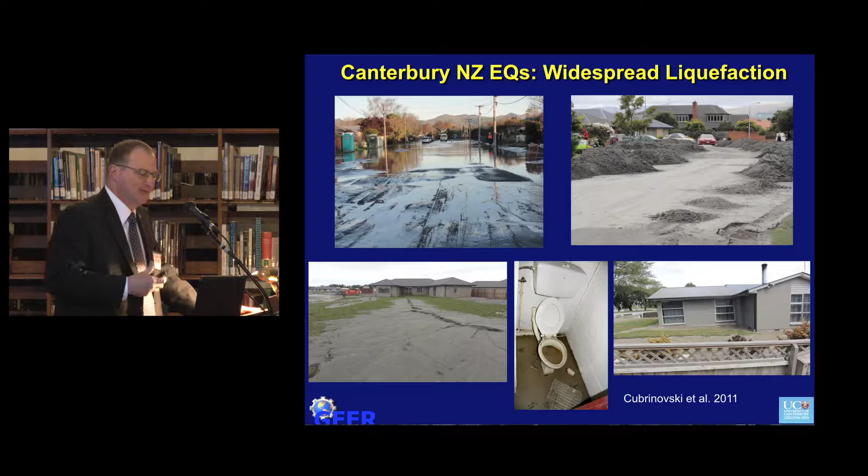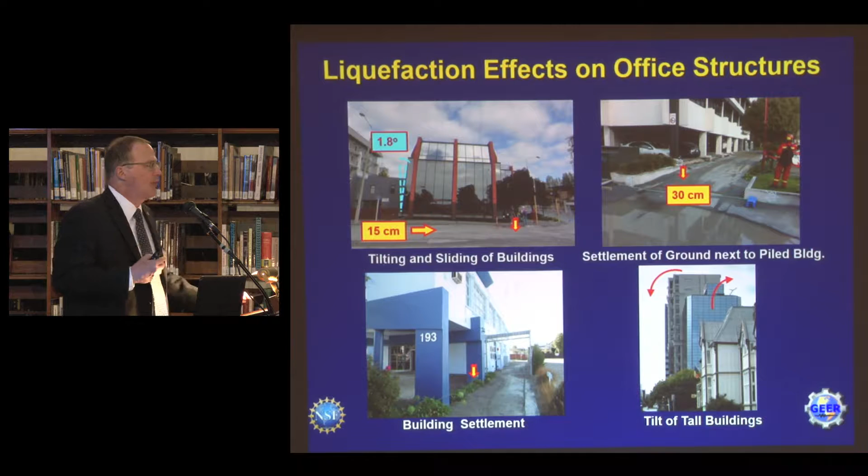There were important issues in terms of the office buildings in the central business district. There was an area that had pervasive liquefaction from the 2011 Christchurch earthquake, and we saw tall buildings - even buildings that were 11 stories, even one that was 21 stories tall - have ground that softened and allowed the building to basically tilt, and that was one of the reasons why the buildings were taken down.

When we talk about liquefaction effects, geotechnical engineers realize we have this empirical method where the demand is the cyclic stress ratio, and the capacity is what separates liquefaction effects being observed at the ground surface from where we have no liquefaction. That transition line is called the CRR, the cyclic resistance ratio. In the simple world, factor of safety is the resistance or capacity divided by the demand.

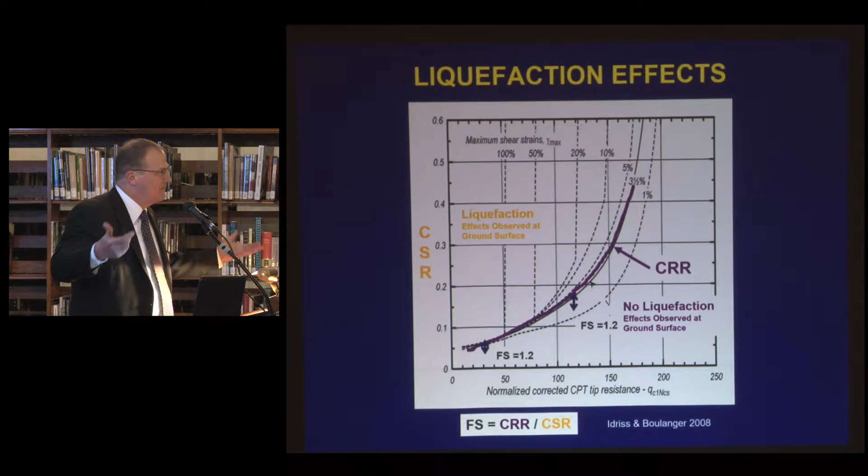What's misleading is we calculate factors of safety, and in this region we could calculate a case where this is our demand, that's our resistance, a factor of safety of 1.2. In this area we calculate demand and resistance and again get a factor of safety of 1.2. That might lead you to think same factor of safety, same effects.

But it's very important that liquefaction is not the same on the left side of this curve as it is on the right side. When we get to low penetration resistance, notice the backdrop I have - strains. We don't want to just talk about liquefaction triggering, because that's one thing. We want to talk about the consequences or effects of liquefaction. You can see here you go from very small strains on the order of 1% to very large strains with small changes in resistance or small changes in demand. That should make us all very nervous.

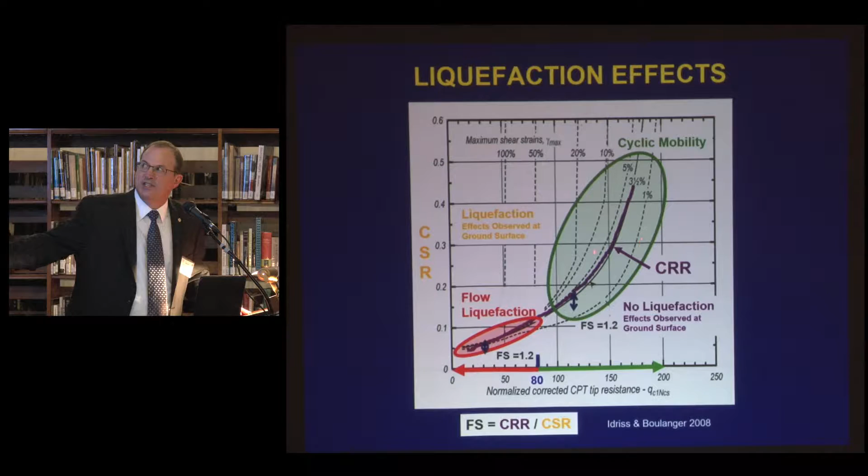That is a brittle failure, and being a little bit off in our demand or resistance calculation can be the difference between having no damage and having severe damage. This is an area where we can get progressively more strains, but it's more of a gentle hill, and therefore the consequences are different. So even though we call it all liquefaction, I think that's one of the mistakes we've made as geotechnical engineers. We really should call this flow liquefaction, or the potential for large deformations, whereas this is cyclic mobility with limited strain potential. They're different animals.

One of the very important lessons from Christchurch was that the most valuable tool was the cone penetration test. It was nearly continuous, giving us this true look of what this fluvial environment looked like. If we're able to catch that at a building scale, we have to have a cone penetration test. They have done now over 22,000 cone tests since the Christchurch earthquake, because that is the most reliable way in sandy and silty materials, and even some clay materials, to characterize the ground.

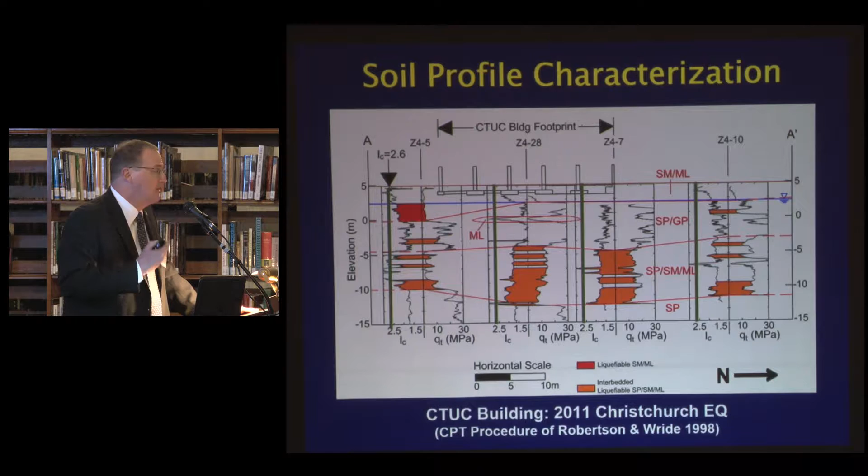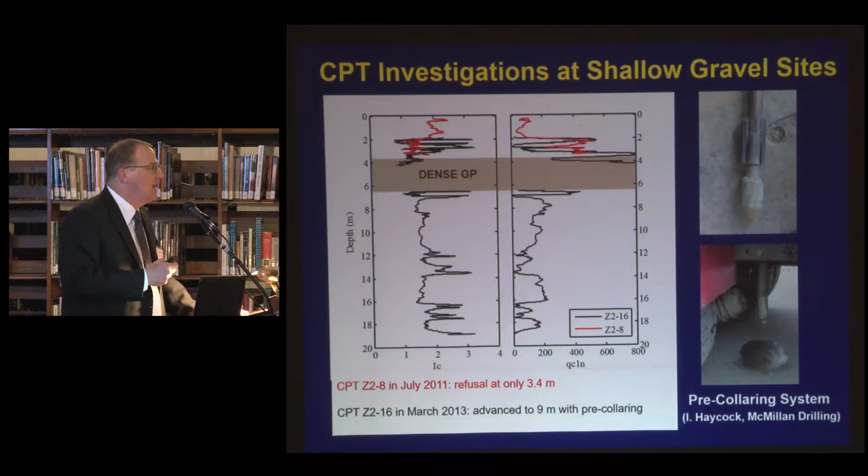One of the arguments about using the cone is, well, I can't advance it through dense gravels or slightly cemented soils - and that's not true. Using Kiwi ingenuity, they came up with a pre-collaring system where, when we hit ground we had not been able to get the cone through back in July, with this new device we were able to essentially use a dummy cone to vibrate through the dense gravel. Once we saw it started to loosen up, we could go back, pull the dummy cone out, put the real cone in, and get there. So there's no reason for not using a cone penetration test in today's world.

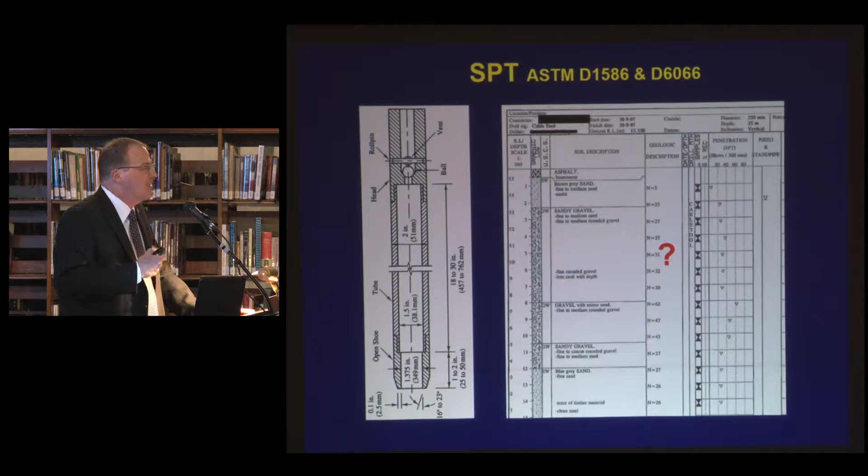The standard penetration test - which name is really the 'not so standard, I don't know what it is' test - should not be used by geotechnical engineers in 2017 or in the future. This great test, invented 100 years ago, has served us well, but it's not the best tool to be used. For example, I and designers in Christchurch have not used any of the SPT data because we don't know what N means. We don't have energy measurements, and we don't know exactly how they did the test. The only test that's been reliable for us, as researchers and as consulting engineers, has been the cone penetration test.

In terms of capturing liquefaction effects, the Japanese have been looking at this and saying it's not just that you have liquefaction, it's the effects of liquefaction. So the idea here by Iwasaki was to integrate the factor, 1 minus the factor of safety. The lower the factor of safety, the worse things should be, and let's use a weighting function that weights shallow liquefaction more heavily than lower liquefaction.

It's a linear scaling. Sjoerd van Ballegooy, working with Tom O'Rourke, myself, Misko Cubrinovski, and others, developed something called the liquefaction severity number, which has two important things. Instead of just focusing on factor of safety, which is an on-off switch, black and white, he's looking at consequence, strain, and using a 1 over z, basically an exponential decay, really weighting shallow liquefaction, because Christchurch taught us that shallow liquefaction, right beneath your feet, is the most important liquefaction.

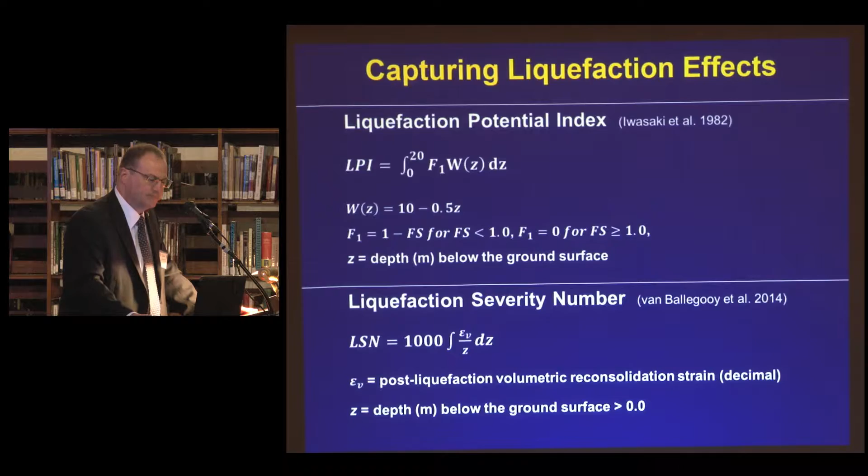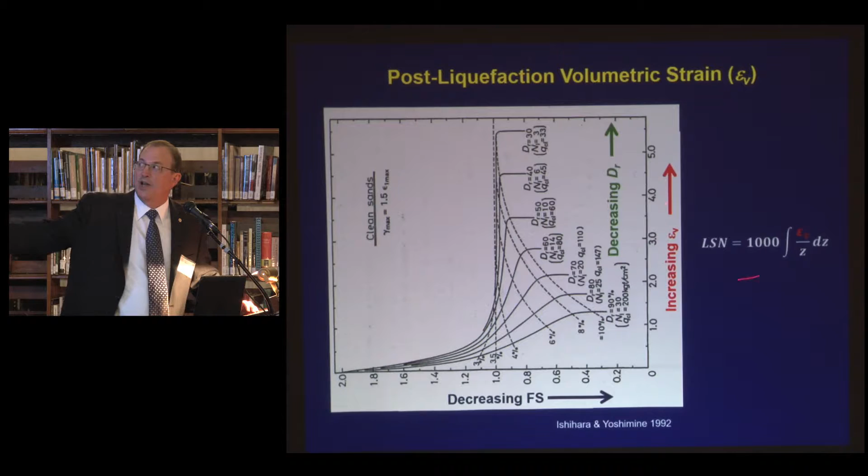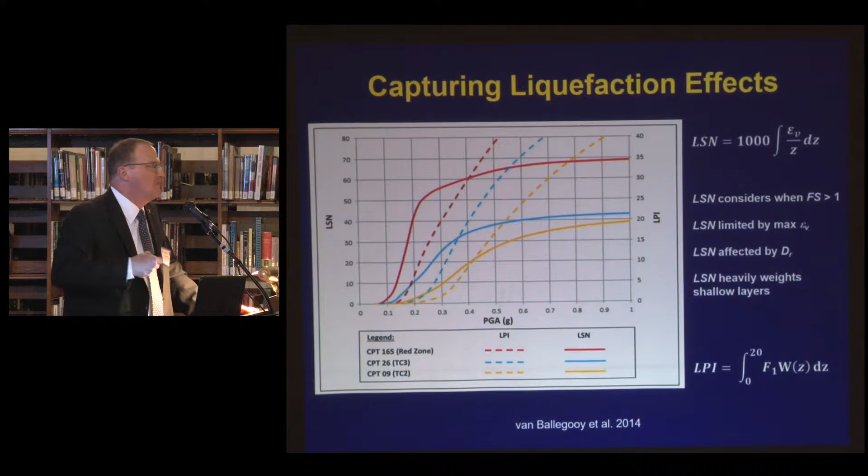You have no effects of liquefaction. You get liquefaction, which is a brittle phenomenon. And then whether you get 0.4, 0.5, or 0.6G doesn't matter. You have massive liquefaction, you have massive liquefaction. So this is a better tool for looking at liquefaction effects.

So you could say that that's a tool that you could use in a place like New York to do some regional planning to get a sense of where you might have your more severe liquefaction issues.

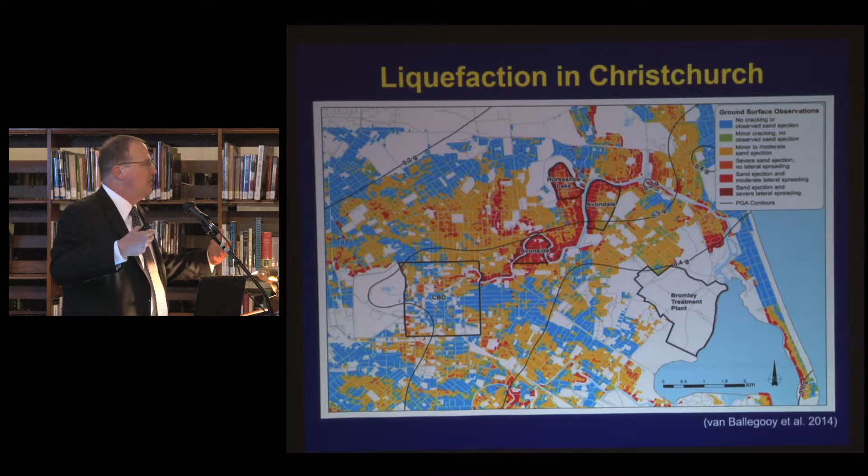Now, one thing you might notice is an area where our techniques, mainly because of the liquefaction procedures we use, said there should be significant problems, but they really weren't. So you focus first on areas where there's high damage, but then you want to go back when people are being asked to spend hundreds of thousands of dollars to remediate ground. Should they be doing that? Well, our procedures are saying there should have been a problem, and often there was not.

So this is just one of the sites in the southwest part of the city where this area was strongly shaken by 5 earthquakes. In one case, the ground shaking was 0.4G, and there was no liquefaction ever observed. Yet our simplified methods say we should have seen liquefaction there.

Are we going to ask this owner, because our methods say there was supposed to be liquefaction, to invest hundreds of thousands of dollars to remediate the ground and improve their foundation? No, we should be listening to case histories and the field data, and wonder why our methods are overly conservative.

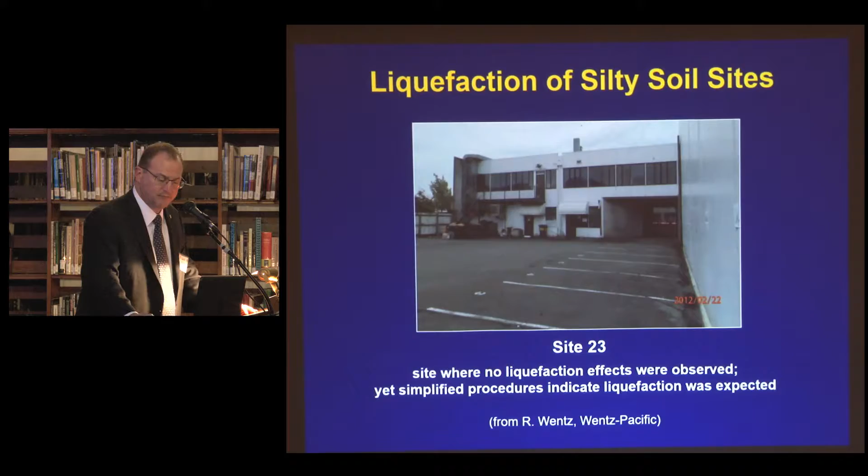When we look at the methods, again, any triggering technique, this ended up using the Robertson and Wride approach, but whether you use Boulanger and Idriss or the Seed method, we calculate low resistances from our penetration resistances. We have high demand, so therefore the factor of safety in these layers is uniformly down around 0.5.

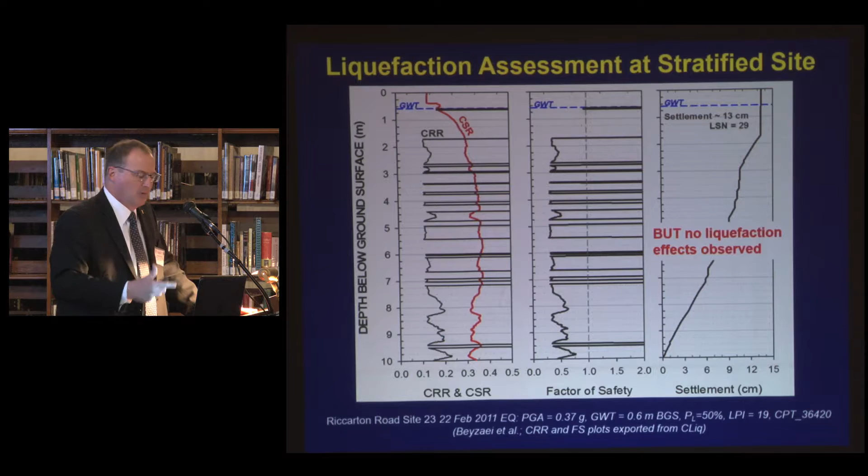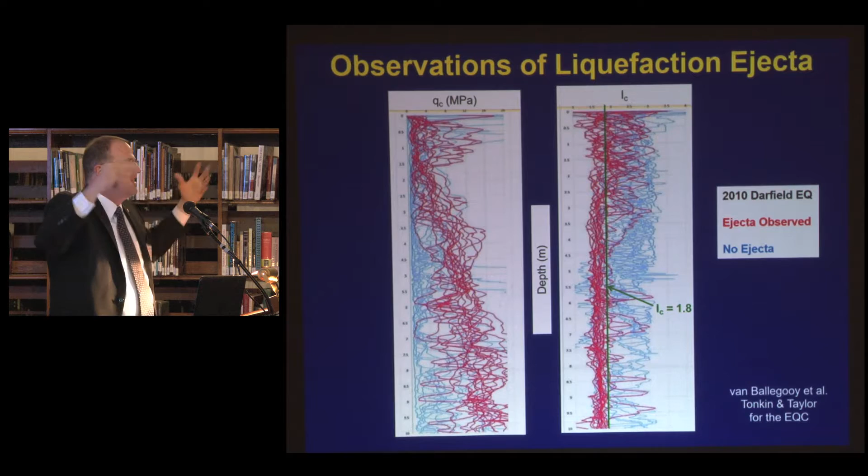If you correct these for fines content, you'd get them up around here. You have similar types of tip resistances. What you really see is that all of these red cases are uniformly thick deposits of clean sand. You realize liquefaction is not an element, it's a deposit with water communicating to each other that causes major problems. That's what we're missing when we just look at individual layering - we're missing the fact that a thick layer able to move its water rapidly throughout that entire layer can have a lot of ejecta, whereas a bunch of thin, disconnected layers is like having individual pipes not connected, so we don't get that major ejecta.

In fact, it's all about geology. If we go back and recognize Christchurch was largely developed because of the gold rush and other types of people moving there about 150 years ago - if you look at photographs from 1880, that's what Christchurch looked like. In 1850, they basically started in the area that had the shallow gravels. That's where you would start, and that's where you build your cathedral. Then you would move out into the poorer ground.

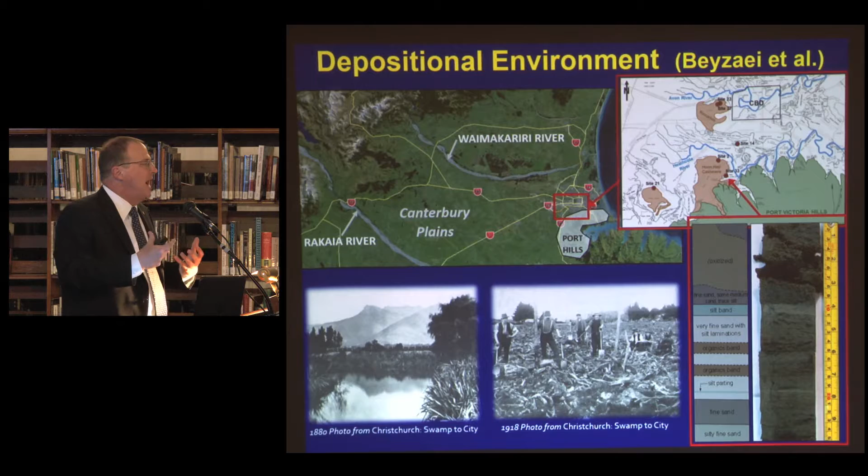But the poorer ground has low penetration resistances, but it's highly layered. You might have soils that might liquefy, but they're surrounded by soils that won't liquefy, and we don't have this communication. It shows the importance of not just relying on the cone, but maybe moving to continuous sampling and actually doing geologic mapping of the samples to really look at the geology and understand it.

In fact, that's something that plays importantly here in New York - there's cases where you get varved materials that have this interlaying, that have low penetration resistances, but then you ask, will they actually have significant effects from liquefaction? They might have liquefaction at certain layers, but it's not going to be the same disastrous effects you'd get from a uniform clean sand material.

And in fact, it really points to the purpose of laboratory testing. This is from a project where initially the tip resistances from the cone and the SPTs suggested you had a certain resistance. This is the demand, so there was a potential of severe liquefaction and consequences. But after testing this material, because it also had an overconsolidation ratio that made it more resistant, the laboratory testing suggested the strengths were about twice as high. So I think there should be a renaissance in reconnaissance, like Ellen mentioned, but there should also be a renaissance in laboratory testing.

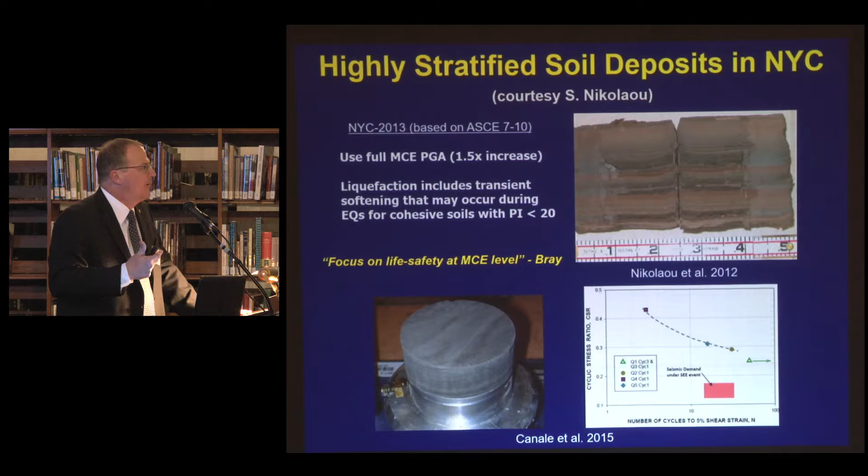Another important thing is we geotechnical engineers focus a lot on fines content. Fines content happens to be the percent passing the 200 sieve. I remind myself that soil doesn't know there's a 200 sieve. If I have a soil that's a very fine uniform sand made of quartz, or a very coarse silt made of quartz, it doesn't act any differently. I think there's been an over-reliance in our profession on simple things like fines content, where in some cases, maybe for a well-graded material that might matter, but for uniformly graded very fine sand and very coarse silt, it doesn't matter.

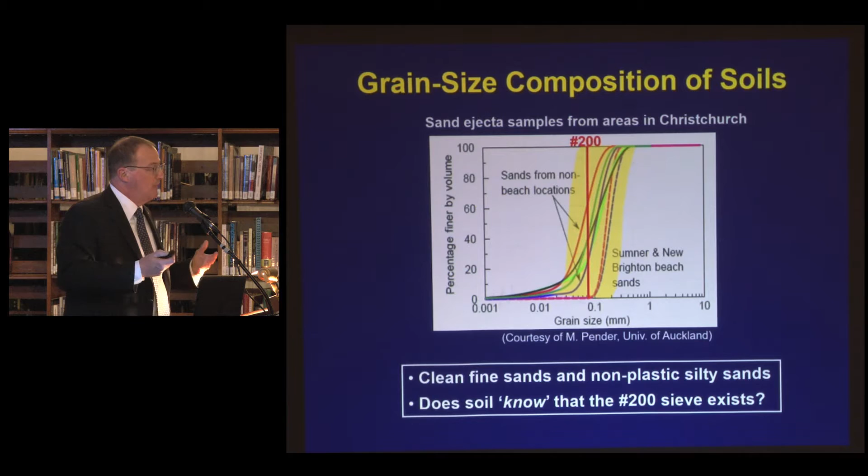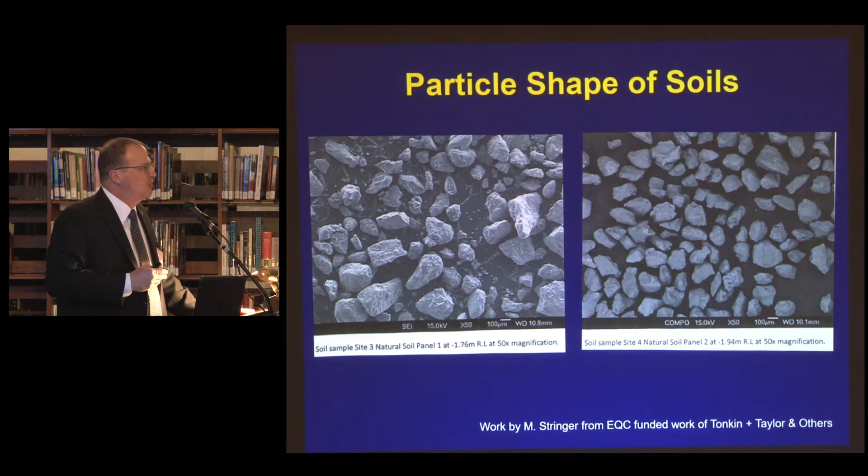The other thing is it's brought me back into looking at soil. As much as we get high tech, I sometimes forget to look at the soil. When you take this material and look at it, you realize this is different than a rounded sand that might actually liquefy and flow. This is a material that's actually very angular. So if it softens, when you start to push it, it's going to lock up because it's a very angular, dilative material. Looking at soil and the geologic detailing, there are ways of couching judgment or adding judgment to our analytical techniques so that we're not bound by them, or we have ways of explaining why they might be overly conservative.

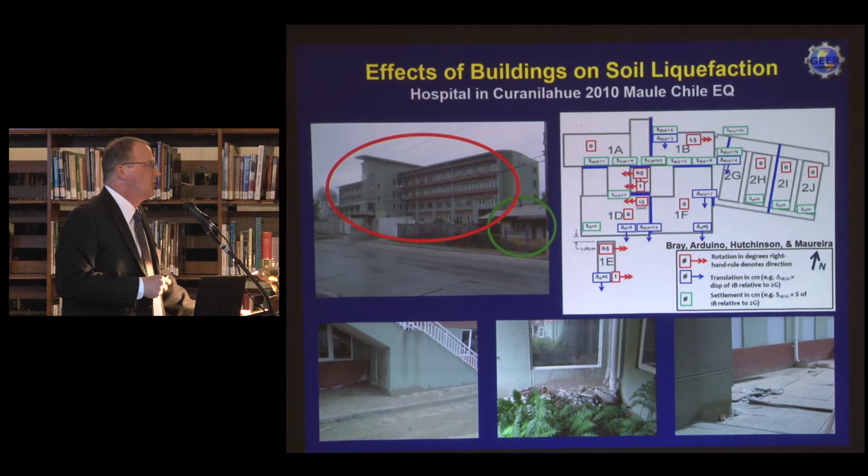Structural engineers always talk about liquefaction being bad for their buildings. Buildings are bad for soil. Here's a case - this entire town of 1 to 2 story buildings had no evidence of liquefaction. They decided to build a new regional hospital that's 5 to 6 stories tall, and that's the place they had liquefaction. In fact, this regional hospital was put out of commission, and they were using a tent hospital to care for people after the 2010 Chile earthquake, because the heavier load put in inertia forces which caused higher strains and deformation. So when you put a building on a site, realize that you're potentially putting more demand on that site.

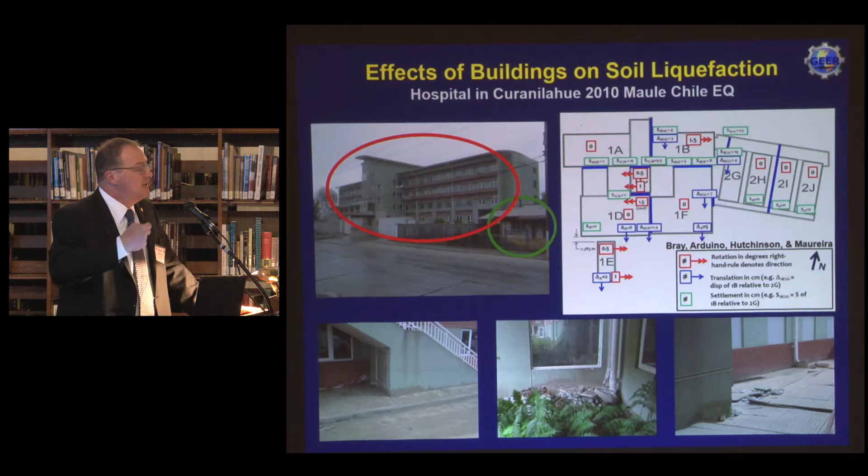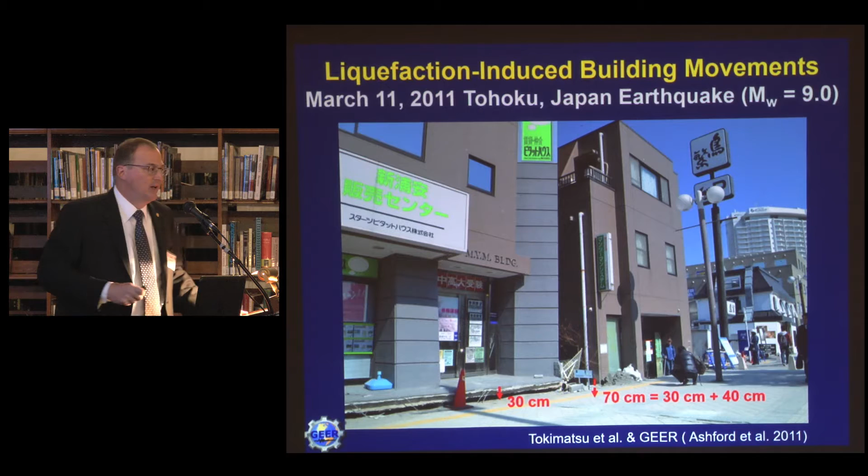In terms of what liquefaction does to buildings, this is a good example from the Tohoku earthquake. We have a pile-supported building that did not move down, then liquefaction of the hydraulic fill, and everything went down 30 centimeters. But what this building cares most about is that it went down 30 centimeters because the ground went down, but it went down 40 more centimeters because it punched in due to shear deformation. So it's not just volumetric reconsolidation, but also shear-induced deformation from this shallow building on a mat. The total settlement was 70 centimeters.

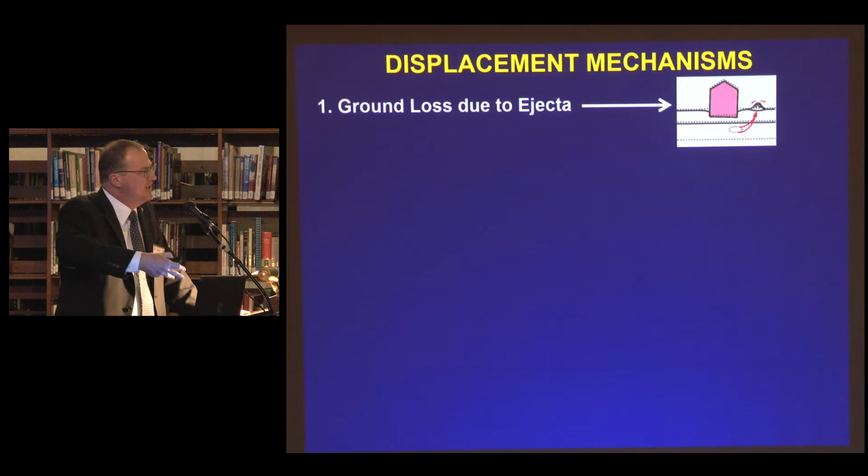When we look at displacement mechanisms, never forget that the most important mechanism is ejecta. If you get 6 to 12 inches of sand on top of the ground that used to be beneath your foundation, that's not good.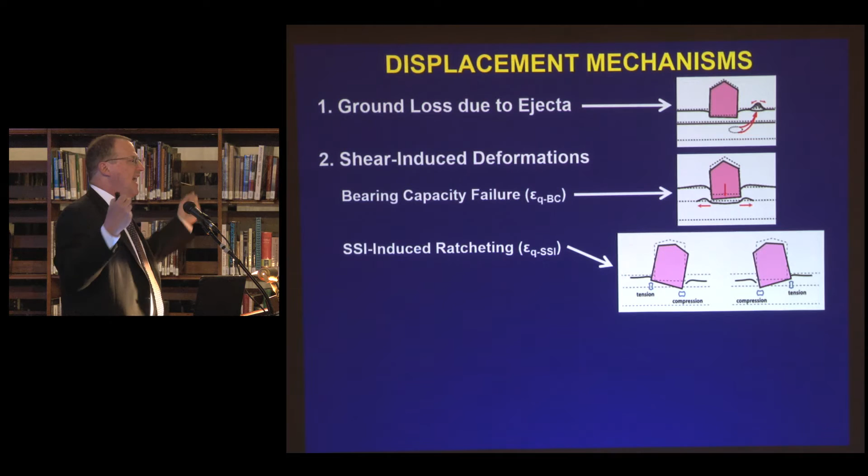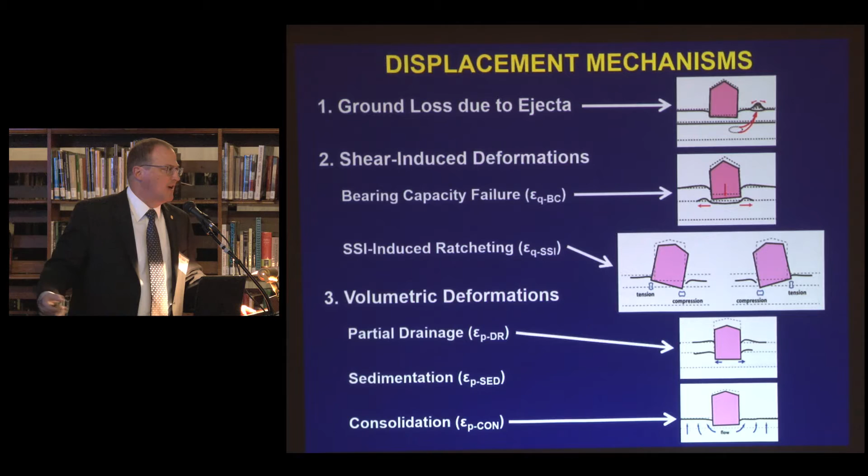The second most important problem for significant buildings, your multi-story buildings that have inertia and mass, is that the ground softens, which can cause the building to punch into it. Then as the building rocks back and forth, it does a cruel thing to the soil, pulling on it and then hitting it, pulling and hitting. That action allows it to work its way into the soil more actively. We call that SSI ratcheting. Last and least, for most buildings, is volumetric deformation, which should be considered but is often the third most important thing.

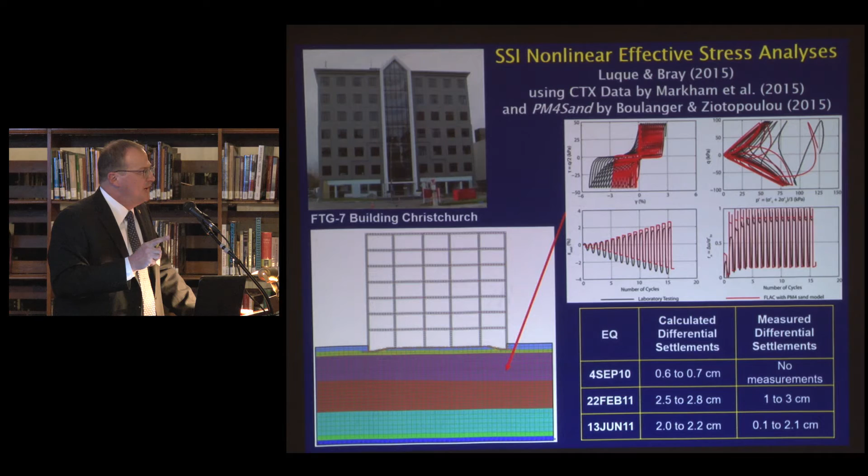The positive is with advanced analysis, we can do a good job and capture these effects. If we understand the ground motion, if we understand the site, if we've calibrated a numerical model to handle this type of loading, we can get calculated differential settlements affecting the structure that are very close to what's measured. And of all those ifs, good analysis couched by good laboratory testing depends on excellent sampling.

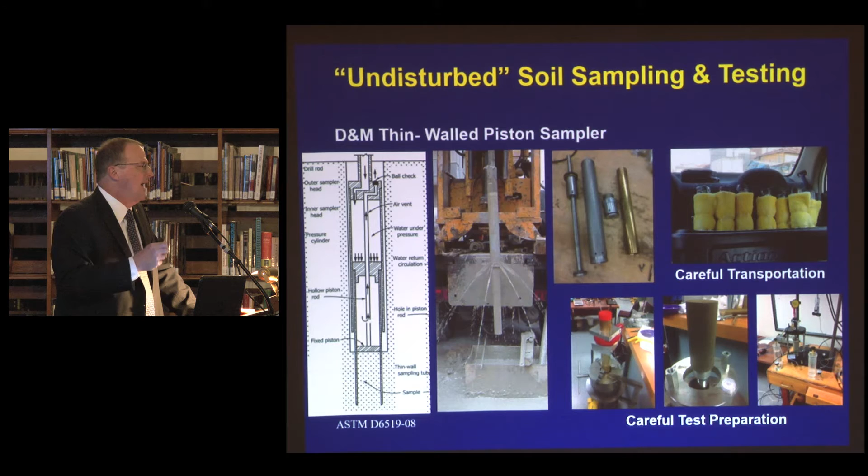If we're going to invest the time in doing advanced analysis to gain important insights for important structures, we need to invest the time and care to do the best possible sampling. Bad samples and bad testing will lead to bad analysis.

In conclusion, I think this sequence of earthquakes taught us that loose, shallow sands and non-plastic silts, the silty sands and silts, led to much of the damage. And much of it was because of ejecta. So that's the most important thing to focus on.

However, on the positive side, there were areas where we had low penetration resistances. Our cone penetration testing and SPT testing would suggest this was going to be a problem. Our simplified methods, validated by a number of case histories, would suggest this would be a problem. However, there was no liquefaction, even when severely shaken.

That really points us to the way to get out of that: do sampling and both map it geologically, looking at the geologic details and understanding the depositional history, but then also test it to get better resistances so you don't have to rely just on the simplified method. We can sample fine-grained materials. Can't sample sands easily, but we could sample fine-grained materials, or silty sands in some cases.

When we look at building performance, consider shear-induced deformation and ejecta, because those are critically important. Don't just look at techniques that are based on free field volumetric strains, because you're missing the most important things.

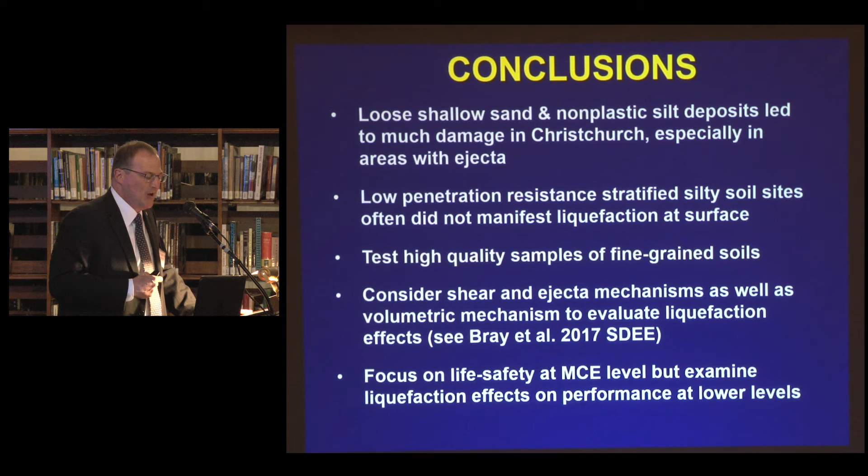There's a paper that I'm fond of, because I guess I wrote it, published in 2017 in Soil Dynamics and Earthquake Engineering, that gives you a simplified method of dealing with it. A lot of it depends on engineering judgment and case histories. Analysis can only take us so far.

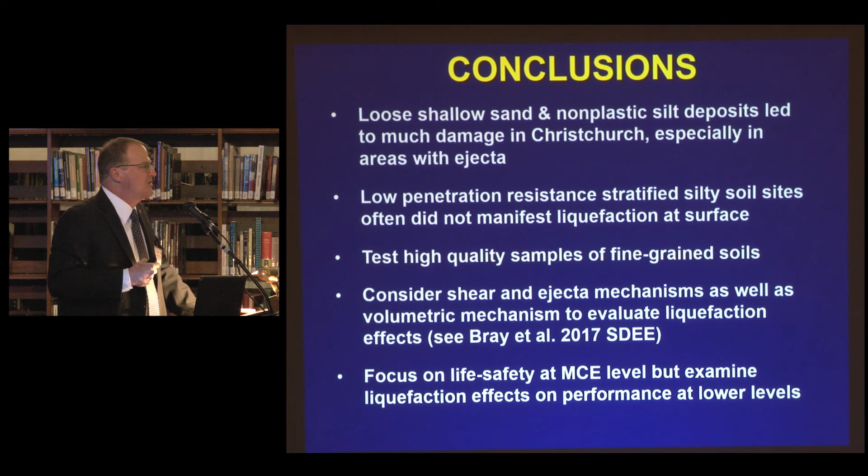Last but not least, as the New York Code and others have relied on ASCE 7-10, and moved to an MCE ground shaking level which is 1.5 times what the ground shaking level was before, we often calculate liquefaction at sites that just before we didn't calculate liquefaction.

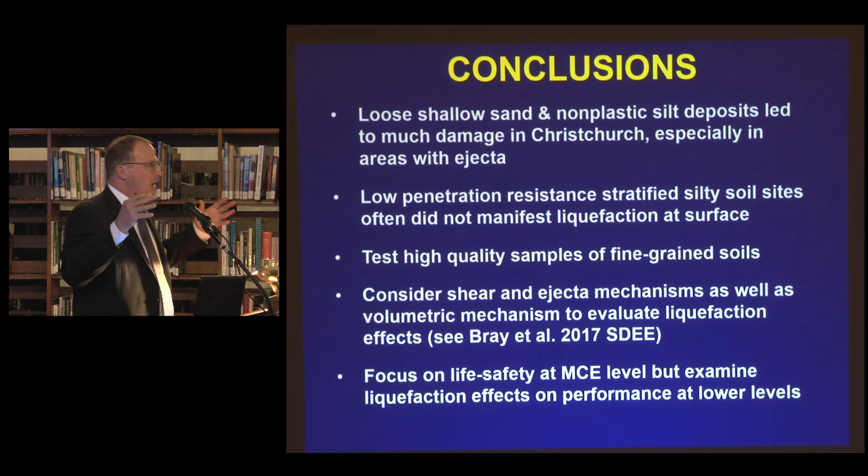I think it's important to remember that what we care about in terms of the MCE level, that 2% in 50-year ground motion, a very rare earthquake, is life safety. So we don't need to worry about maybe 6 to 12 inches of settlement if the structure is built well. One thing we learned from Christchurch and also from the Japanese is that a well-built foundation that ties everything together is worth its weight in gold.

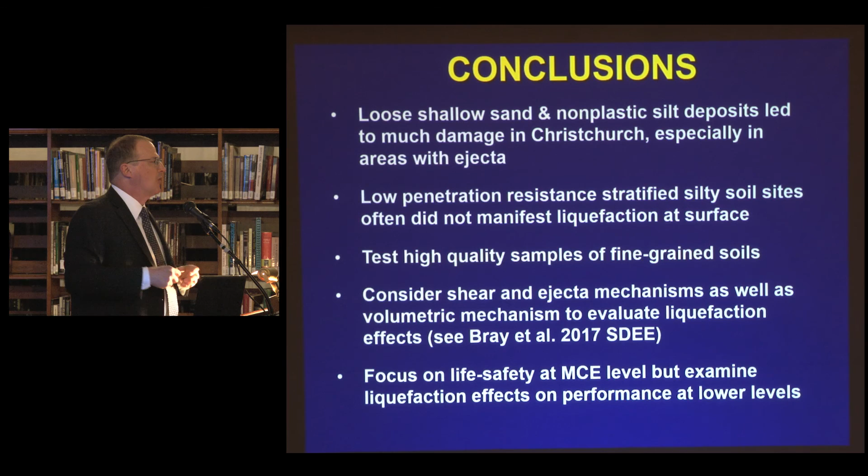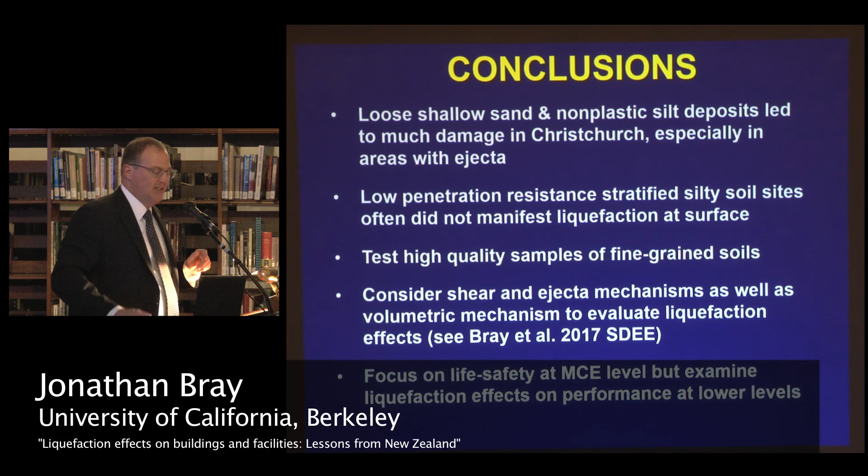We should also look at the lower levels of acceleration and look at consequences and how that might affect the performance of the structure. But at the MCE level, it really is a life safety issue for foundation engineers. Thank you.